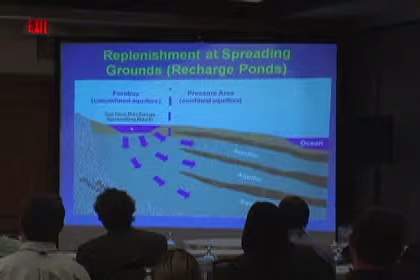A little cartoon sketch shows that concept of how recharge basins work: you dig a hole into the sand and fill it full of water, and that water just flows down and can get into all the different aquifers.

As you go further towards the coast, you start getting this layered system with confined aquifers. You would not be able to go into the city of Long Beach, for example, and dig a hole and have any effective recharge getting down to the lower aquifers. But we're lucky, we've got this Forebay region, and it's actually pretty common in some of the coastal aquifers in the area.

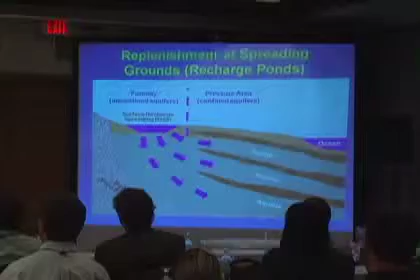In the Montebello Forebay, there are 2 spreading facilities: one is the Rio Hondo spreading grounds, and one is the San Gabriel spreading grounds. We've heard a little bit about these at the session so far. They are owned and operated by Los Angeles County Department of Public Works.

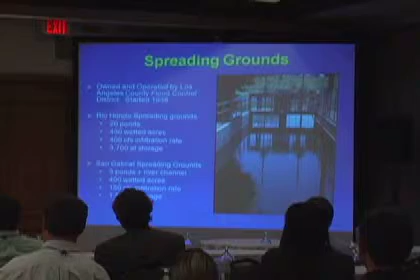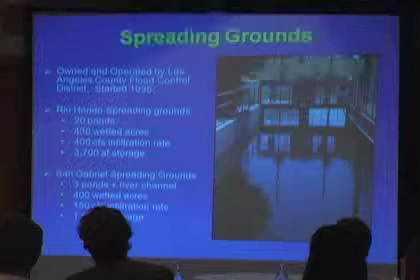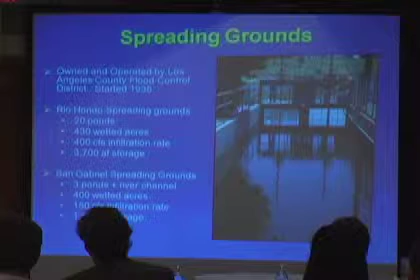San Gabriel spreading grounds, a mile away, has 3 ponds, plus the river channel itself is soft bottom, and the water can just soak into the river bottom if you can stop the water from flowing.

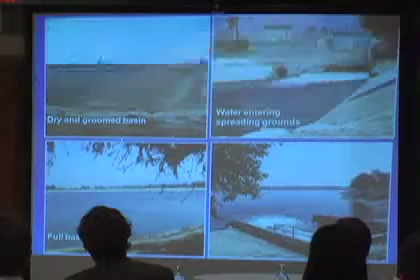So this is what the basins typically look like. There's a procedure that LA County does to groom the basins, remove the silt, and get them prepared for recharge water, and then the water can turn on and start entering the facility.

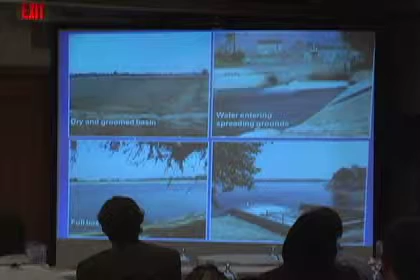And this is what it looks like on a good day when it's filled with either storm water, imported water, or recycled water.

The amount of water that goes into these facilities currently is around 54,000 acre feet per year of storm water captured. We've got about 50,000 so far this year with those December rains, but we're still actually short of an average amount. Imported river water from Colorado and from Northern California is around 21,000 acre feet per year, and the recycled tertiary wastewater is currently 50,000 acre feet per year.

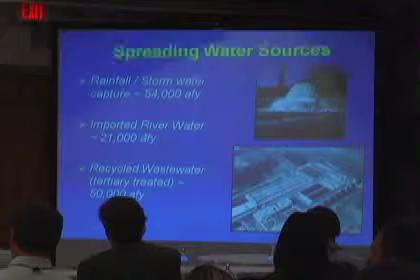Basically my story is that this water is becoming less available. The imported water hasn't been available since May 2007, so over 3 years of lack of this supply, and we're having to buy more expensive imported water. To mitigate that, we're looking at ways to capture more stormwater to increase this number and balance the overdraft in the basin.

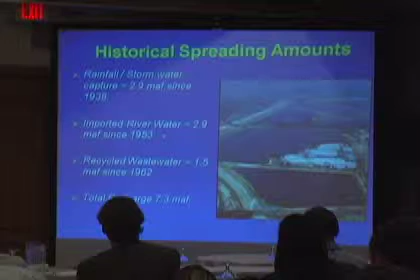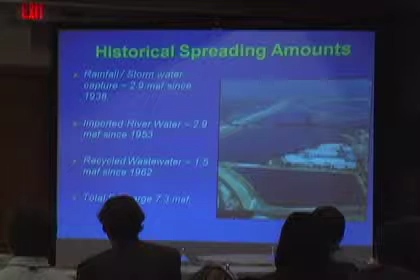Historically, since 1938, 2.9 million acre feet of stormwater has gone into the ground at these facilities. Also, since 1953, the first year for imported water, another 2.9 million acre feet has been purchased to fill up the aquifers. Recycled water since 1962 is about 1.5 million acre feet — a tremendous amount of water. So 7.3 million acre feet so far has gone into just these 2 spreading facilities to help replace the extracted groundwater.

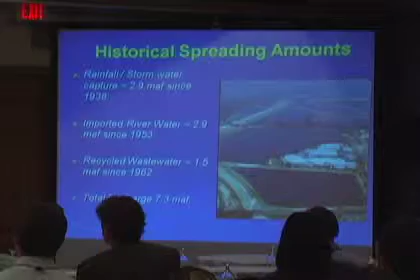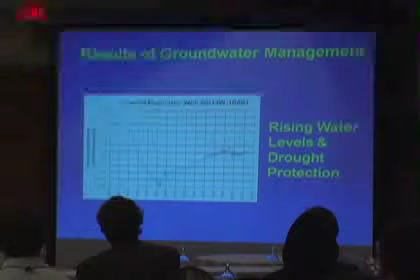As a result, you can see from the water level hydrograph that water levels almost immediately rebounded back in 1960 when the pumping adjudications took effect and the replenishment districts started putting in water. You can see the big rebound. Right now we're pretty happy with where water levels are. We don't want them to come back up to the historic highs because we had the flowing artesian wells and other problems we don't want to reactivate.

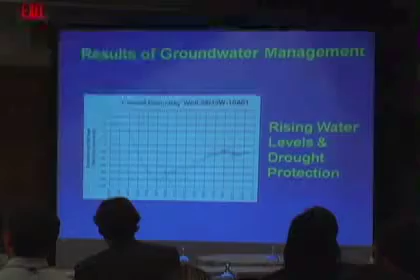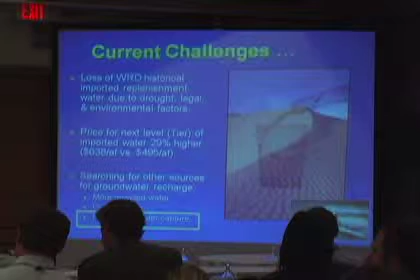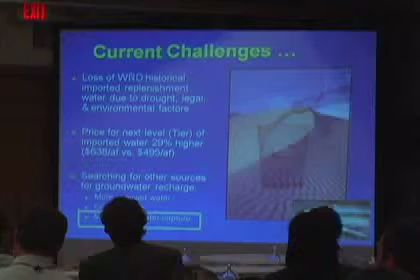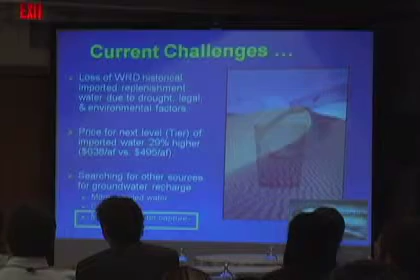Our current challenge is the loss of the imported water we typically have bought, due to drought conditions up in Northern California, environmental factors with the Delta smelt, and judicial decisions. We're having to buy water now since we can't get the cheaper surplus imported water, which would be $495 an acre foot. Instead we're buying the $638 per acre foot water through the member agency to Metropolitan Water District, and we have to buy about 21,000 acre feet a year of that.

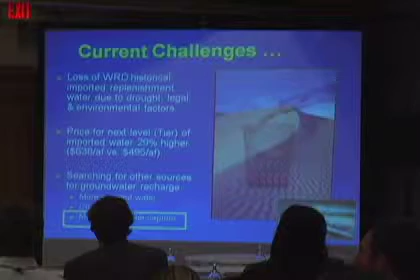So we try to find other sources to offset that imported need. More recycled water is a big project we're looking at, as well as conservation to reduce the overall demand for water supply, and more stormwater capture as another attractive alternative, which we are working towards getting more of.

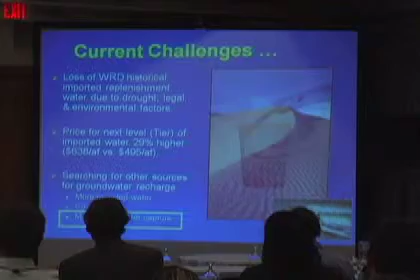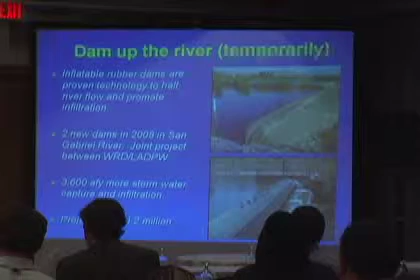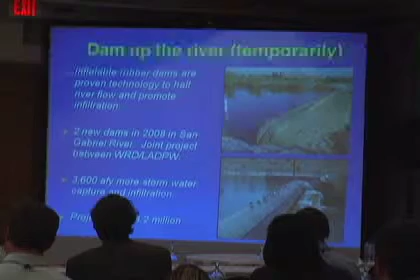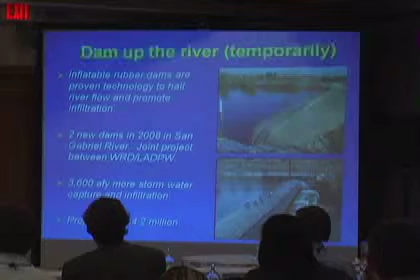One way to capture more stormwater is to temporarily dam up the rivers. I know a lot of environmental folks don't like damming rivers, but these are inflatable rubber dams, historically manufactured by the Bridgestone company, owner of Firestone, in inner tubes, tires and such. It's just a big piece of rubber filled with air and laid across the river channel, inflated when there's stormwater. It dams up the river, slows the water down, and the water then soaks into the permeable soft bottom sediments. We built two new dams in 2008 with the Los Angeles County Department of Public Works.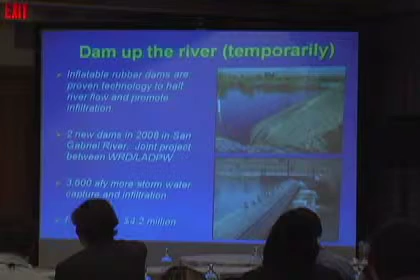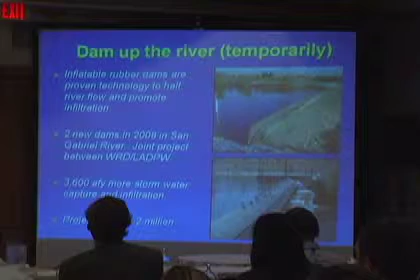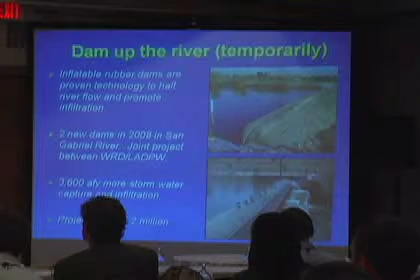These dams are on the San Gabriel River to help capture more stormwater. The cost was $4.2 million, so about $2.1 million per dam. They're not cheap, and we sometimes deal with vandalism, people burning fires at the base of them or shooting them, so there are different strategies to try to prevent that. But they capture about 3,600 more acre-feet per year of stormwater, so these things pay for themselves in about 2 years, considering the price of imported water we're buying right now. A very effective means of creating groundwater recharge.

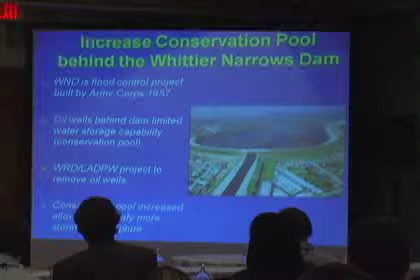The next thing we're doing involves the Whittier Narrows Dam, at the northern end of our service area, built for flood control by the Army Corps of Engineers in 1957. It fills up with water, and the Army Corps holds that water until the downstream spreading grounds drain. Once those spreading grounds are drained, the Army Corps releases the dam water, and it gets to the spreading grounds. But there are oil wells, oil production going on in that same area that looks wet right now, and because those oil wells were there, we couldn't have the conservation pool full of water very high. The oil wells were in our way.

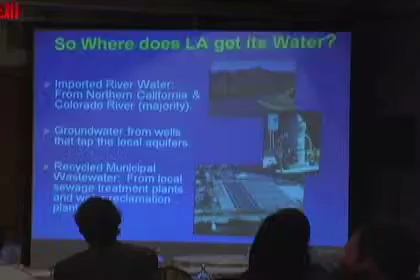In a rare success, we were actually able to buy out the oil wells with LA County and have them move out of that area, which allowed us to fill up the conservation pool with more water. They were planning on abandoning those oil wells anyway; if they were really heavy producers, it would have been tough to buy them out.

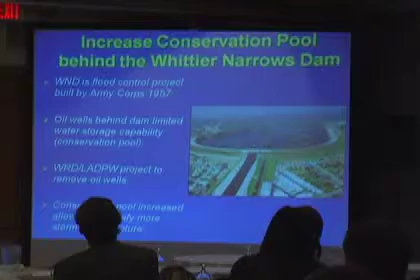So buying out the oil wells and filling up the conservation pool has allowed 3,000 more acre-feet a year of water to be recharged into the Central Basin.

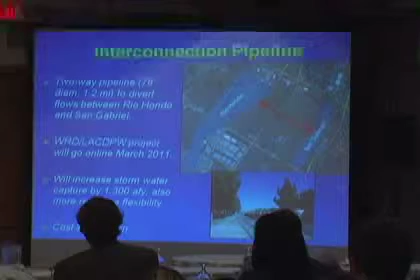The third thing we're doing right now is constructing a brand new pipeline with Los Angeles County. Nothing too crazy about it, other than for the first time we're going to have a connection between those two spreading facilities, just a pipeline down an existing street. It's a 78-inch diameter pipeline. Here are pieces of the pipe that will be trenched and laid in the ground over here. It's going to be finished in March of this year, and that will allow us flexibility to move water from one spreading ground to the next.

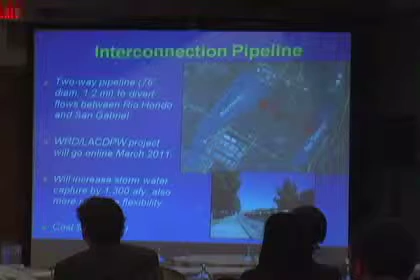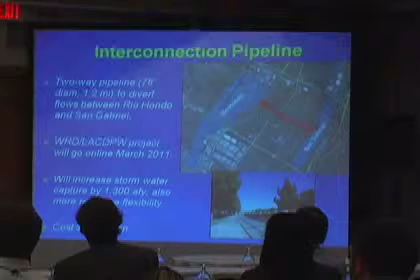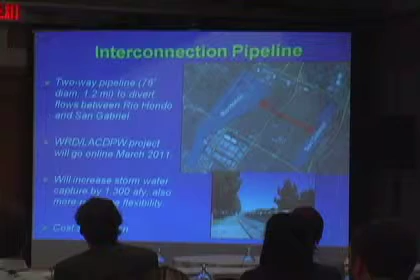The problem right now is when one spreading ground was full but the other wasn't, the full basin would just have to waste the water and lose it. Now we'll be able to transfer water from the full one to the less full one and balance them both out as if they were one facility. It goes by gravity one direction or pumps to pump it up the other direction. That will allow us to increase stormwater capture by 1,300 acre-feet per year. The cost of that pipeline is $7.6 million, so it'll take a little longer for the payback, about 10 years or so.

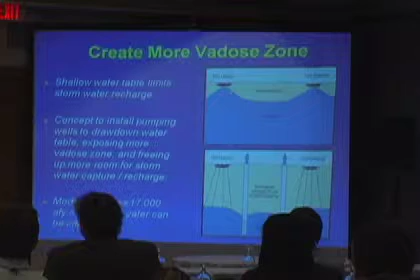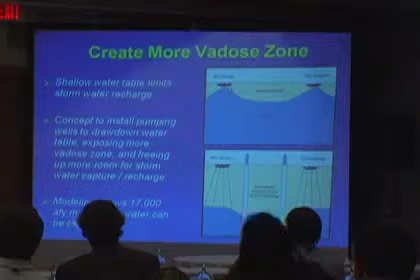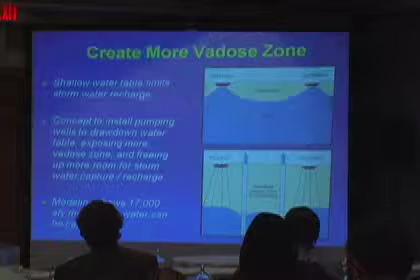The fourth thing we're looking at to capture more stormwater is to lower the Vadose zone. We need more Vadose zone. Right now, during big storm events, beneath the two spreading grounds, the Vadose zone rises to near the pond bottom. Normally it's down at 30 feet or so, but during heavy storm events the mounding builds up, which causes the percolation rate to go down considerably, and you lose the rest of the stormwater — it just flows down to the ocean. So there are plans being looked at to install production wells in the area and pump out the groundwater, lowering the Vadose zone, which frees up more space for more stormwater capture.

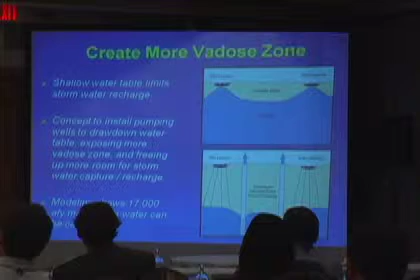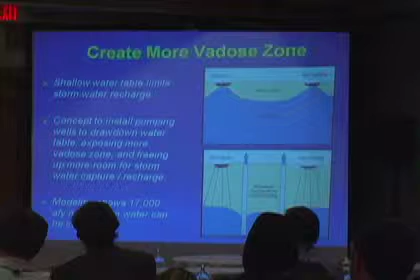All that water pumped out would be piped and served to drinking water users downstream, so they wouldn't have to operate their own wells anymore — they can use these wells instead. These wells would run all year round, creating a deeper Vadose zone and getting more stormwater in there. The modeling we showed found that if you pump out 24,000 acre-feet of water, you can get 17,000 more acre-feet of stormwater. So a tremendous amount of stormwater can be induced just by creating a deeper Vadose zone, preventing that mound from getting too close to the ponds.

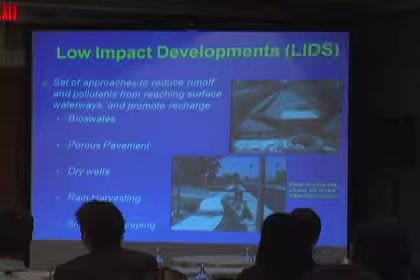And then finally, when we don't have spreading grounds to deal with, we go out and look at other parts of the groundwater basin. So we're looking at a lot of low-impact developments, or LID type projects. These are mechanisms to get rid of surface runoff after rain events into the ground at your facility, or even a residential home, instead of having that water run to the storm drains and get to the ocean, picking up greases and oils and all that. There's concern over water quality and such.

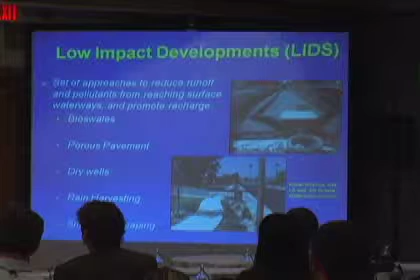So designing ways to get the stormwater into the ground at your site will greatly assist in groundwater recharge. Of course, your soils need to perk. You need to have good geology and good ability to put the water in. But we've identified quite a few areas through modeling, land use analysis, GIS surveys, and some pilot studies to get that water into the ground. Bioswales is one technology, with really nice porous pavements. Dry wells, rain harvesting, and smart landscaping are some of them.

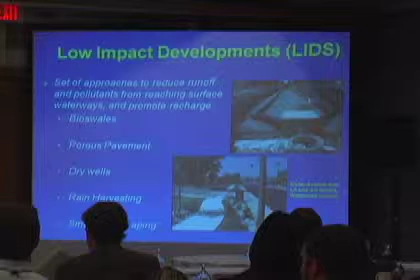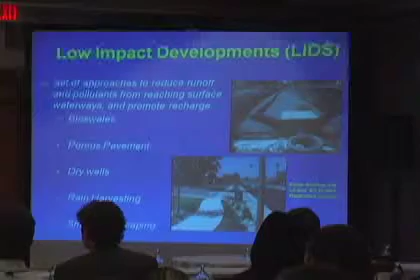One project has recently been completed through the LA and San Gabriel Rivers Watershed Council. It's on Elmer Street. They just dug up the street, laid gravel in the bottom, and laid collection pipelines with mechanisms—these pipes have holes in them, and the water will just go down into the street, underneath the street. That way it will collect all the rainwater on that one street and just soak into the ground instead of running off. This is what it looked like afterwards with the street.

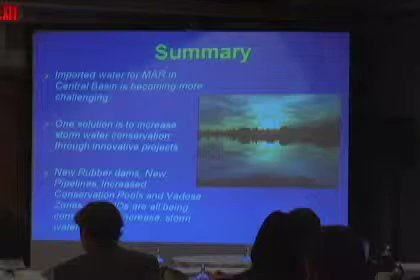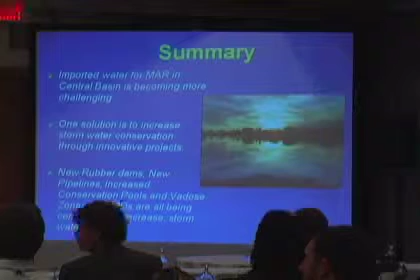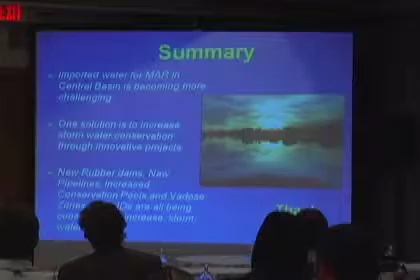So in summary, imported water for managed aquifer recharge in the Central Basin is becoming more challenging. It's more expensive and less reliable, but we still have to fill up the aquifers. So one solution is to try to get smarter with stormwater conservation through innovative projects. I described a few projects here with new pipelines, conservation pools, rubber dams, and LIDs. All those things are being looked at just to try to capture more rainwater. So with that, I'd like to answer any questions. Thank you very much.

Yeah, we've got time for a couple questions. Jordan? Have you considered removing some of the lined portion of the Rio Hondo and operating it like the San Gabriel River?

Dam? Yeah, we've looked at it. It hasn't been proven too favorable to unline the concrete channels. The Army Corps owns and operates those, and there's an area of rising water and shallow water in the northern part of the Rio Hondo, and by removing those, we'd have to do a lot more pumping to lower the vadose zone there, I think. Removing the concrete is tough. We've been looking at the LA River, which is concrete the whole way, trying to remove that and promote recharge. But in order to remove the sleek superhighway of drainage for storm events, you would need to widen the channel quite a bit for flood control, and that land just isn't available. So in order to maintain flood protection on the Rio Hondo, we're going to need to keep the path of the concrete channel.